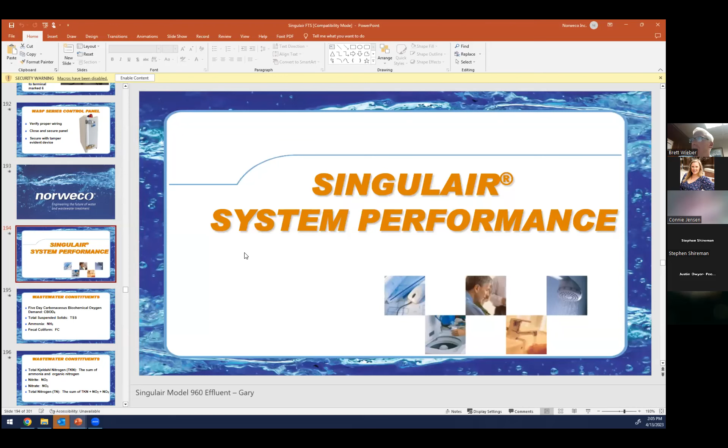Looking at this slide presentation here for a minute, talking about various performance standards, I think you're all familiar, so I won't spend a whole lot of time going over these basic wastewater constituents again: BOD, TSS, ammonia, fecal coliform, and the various other nutrient classifications, total Kjeldahl nitrogen, nitrites, nitrates.

Here, this is the Model 960, and this is a really good illustration of our system. So when you are inspecting or servicing our system, left to right here, pre-treatment, this is the aeration chamber, and importantly, the Model 206C aerator sits above the aeration chamber. The aspirator shaft goes 2.5 feet down into the wastewater. You can see there's the design flow line. And the third chamber is the clarification section. And in that are two crucial parts of our system.

You see the biostatic sludge return that is cast into the concrete. And when you're talking about our green system or our high density polyethylene system, we actually install the sludge return here at the factory. And then also part of that is the biokinetic or the BK system. This is a filter, so it's an effluent filter at the outlet. It also can be a disinfection device if you're using tablet chlorination and dechlorination. And you can see those feed tubes illustrated right at the top of the biokinetic system.

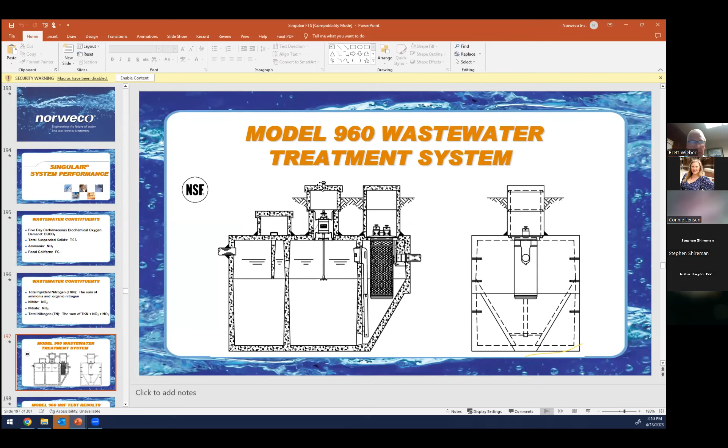Next, very quickly, this is just our test data. And at this point, I just want to be clear, I am happy to make available either our executive summaries or, to those of you who are interested, the full certification reports for both our Standard 40 and 245, and really anything else that you all would be interested in taking a look at. But you can see over this 6-month test that the effluent averaged 6 milligrams per liter CBOD, 10 milligrams per liter TSS.

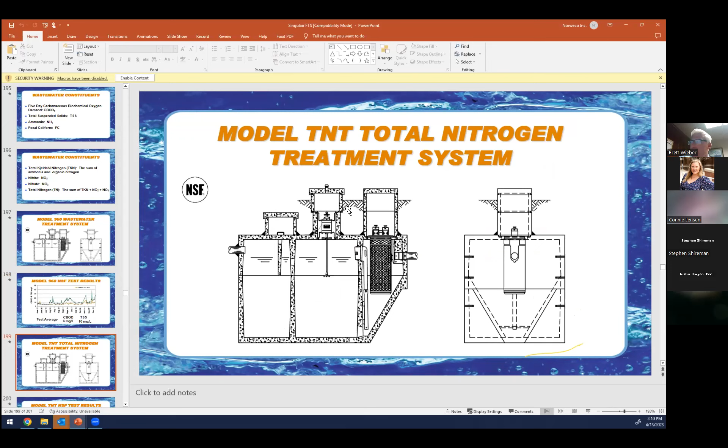This is just an illustration. You just saw this exact illustration, right? So same, the TNT model, same tankage, same components, same flow path. The only difference is the control panel. And you can see here during that NSF 245 test, part of what they test for, even as the 245 test, is the underlying Standard 40, and you can see 4 milligrams per liter CBOD, 9 milligrams per liter TSS.

This just shows the percent reduction. So you can see NSF has a specific standard in terms of both percentage and the amount. You can see during that 245 test, the Norweco Singulair TNT removed nitrogen on average 68% to 12 milligrams per liter. So that is a very aggressive standard.

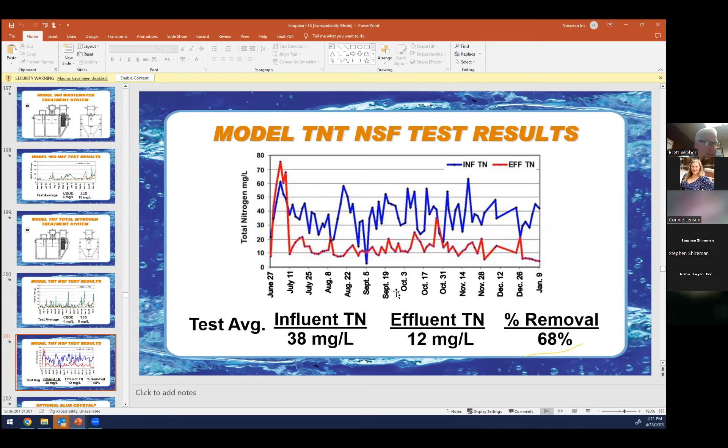This just talks about our disinfection option on the chemical side. I'm not sure if this, oh yeah. So this next slide shows our AT 1500. So this is our UV disinfection system, and this has been on the market now for a long time.

It has gotten a renewed interest because of what we all can agree were unfortunate events with regard to Salcor. And again, it was a sad circumstance. No one's happy about it, but the reality is there needs to be something that is comparable, and the Norweco AT 1500 UV disinfection system is, and many states, including, for example, Ohio, where I'm sitting, have approved that on an emergency basis, is my understanding, as a substitution if there's an issue with an older model light.

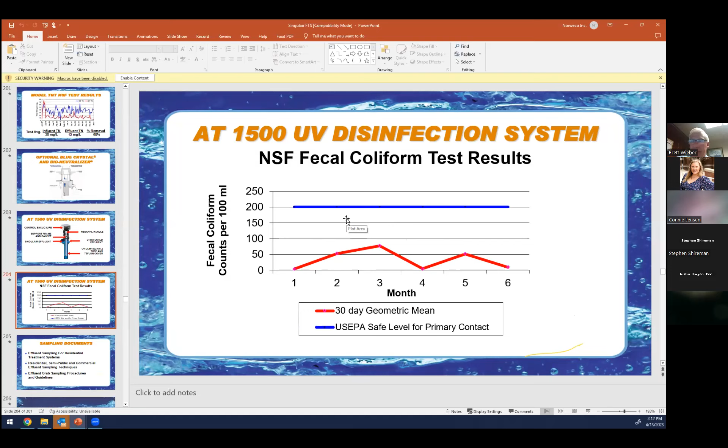This just shows how aggressively our UV system reduces the fecal coliform, and it obviously meets the very strict standard that NSF has, and we can all agree that's a good thing with regard to disinfection of effluent.

And I'll just close on this section. I think all of you probably have forgotten more than I know about sampling, so I certainly would defer to all of you. But I would also say, if any of you ever want to take a look at documents we have prepared in-house regarding proper sampling of our technology, it's a simple matter of giving me or Wyatt or our customer service team a call, or send us an email. We'll be happy to provide those to you. And these are simple 1 to 2 page documents that can provide all this information.

Okay. So next, let's see here, got to get a different presentation here. Bear with me, please. Oh, here it is. All right.

Okay, so I know this really is where we kind of get into the meat of things. I know you all are interested, obviously, in service. The Norweco technology, like all other proprietary technology, does require periodic service, and ours, like pretty much all of them, does require service every 6 months.

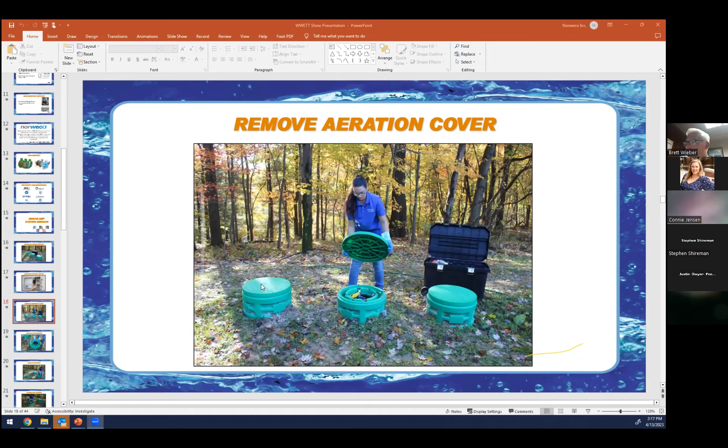The next step is to remove the aeration chamber vented access cover. Now you can see this is an old style Green lid. There is no vent cap, and there is no gasket around the edge. That's to be contrasted with these lids, which will both have a gasket, as we'll see down the line. Very simple. Of course, before you remove the aerator, you sure as heck better unplug it. I think we can all agree on that. Here you see one of our coworkers.

She's carefully removing the aerator from aeration. Now, again, the reason that's important, this is a precision tuned instrument. You do not want to bump the aspirator shaft on the side of the mounting casting. There are 2 set screws. You can see Wendy here is removing those set screws so she can remove the aspirator shaft.

You can then see she's using what effectively is a 22 caliber bore brush on a long steel rod, and she's going to run that up and down the motor shaft. Now, what's very important is you never want to use water under pressure through the Model 206C aerator motor casing. There's several reasons for that, not the least of which you don't need to do it. Simply running the brush tool through that a few times will get rid of any buildup that has come over that 6-month period. But also, you don't want to disturb the bearings in their casing, which particularly water coming from a pressure washer will do.

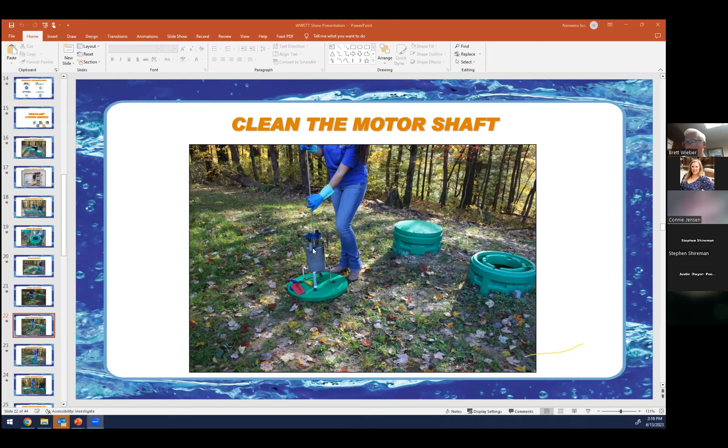You can see here she's using that same brush to go up and down the aspirator shaft. Now, very importantly, 2 things. You absolutely can use water under pressure through the aspirator shaft. There's no problem there. And then you can also see where I'm circling the aspirator tip. So there's 4 little tips that come out. You want to make sure that when you're inspecting it, make sure it's open. In other words, not blocked.

But again, you can also use that tool or a similar tool just to make sure that those 4 little air delivery tubes there are free of any buildup. You can see her doing that there. That's just with a very simple garden hose.

The next thing you want to do, and we're moving now into the step of removing the biokinetic system. First and foremost, you want to use this outlet coupling tool. This is all part of our tool caddy that you can see in the back there that is available through any of our local distributors. So there are literally dozens of folks through which you can purchase this tool caddy. But you can see Wendy is getting ready to insert this sealing tool. That's going to prevent, when we pull the BK, untreated effluent from getting out the back of the system. And it's very important that that be taken care of.

You'll see here, if the system has chlorination or dechlorination, you just simply remove those tubes. Very simple to do that. The moisture vapor shield, you'll see that again. You just want to unlock, just pick that up from around the 4 locking lugs and just set that aside. We'll talk about that a little bit more here as we move on. Next, you want to engage the small handle of a universal tool, which is another tool that comes in that tool caddy I just talked about.

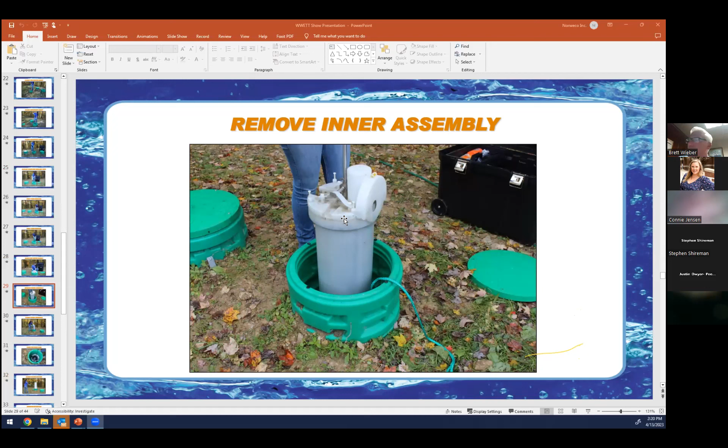That's going to be to take out that inner assembly. You want to lift that straight up. You then want to place that over pre-treatment, and you want to do as Wendy's doing here, gently rock it back and forth and side to side as you spray water in there. Any buildup that's inside that inner assembly will then wash down and will actually flow into pre-treatment. That's biological solid, so it will be a good thing during the service visit. And you want to do that for between a minute, 2 minutes, depending on what kind of buildup you have inside the biokinetics inner assembly.

Now we talk about removing the outer bucket, and it's a very simple process in terms of turning those locking lugs. And then you can see here that blocking tool, which is going to prevent anything from going out the back end of the system that's untreated. Okay, well, we don't show that, but the top of the universal tool can actually fit into the groove you see right around the top of the outer bucket. And you can just gently pull that up after you engage that drain valve at the bottom. And that's something you can do with the universal tool.

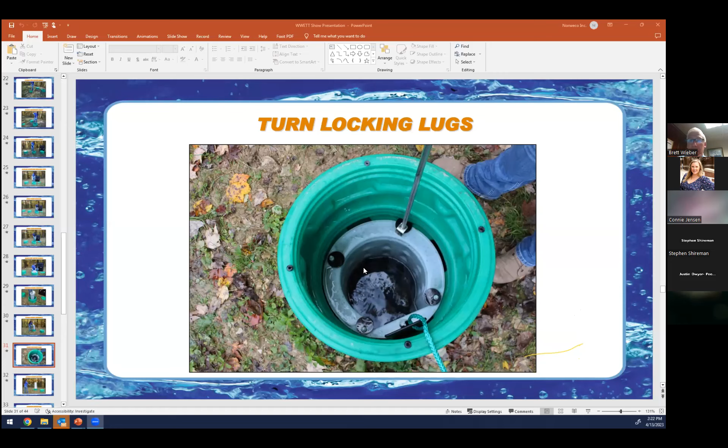Pull that straight up. And as I told you all, the water will literally come out as fast as you pull that out. That was a design improvement, as I said, about 22 years ago, because before that, believe it or not, you had to pump about 11 gallons back to pre-treatment. And I'll be polite and say that irritated some folks. So we heard them and we made an improvement. And we also have conversion kits. We actually make them available for free, where you can put your own drain and fill valve should you run into a more vintage model biokinetic system.

Wendy has turned this over. She's placed it. You can see the drain and fill valve there because this is now upside down. What you want to do is for about 30 seconds, you gently spray that media. So you have the filtration media and you have the peak flow media, and any major buildup will slough down into that safety service funnel and consequently right down into pre-treatment.

And again, this provides biological solids to pre-treatment. So that's going to get into aeration. And again, it will not have a negative effect on system performance. If anything, it's helpful because our system needs some of that biological solid.

So at that point, you reinstall the aerator, and you can see here, it's basically the reverse of when we pulled it out. You, of course, make sure that it's secure. And you want to then, again, plug that in because it needs a power source. You turn that aerator back on, and then what you want to do is you go to the clarification section.

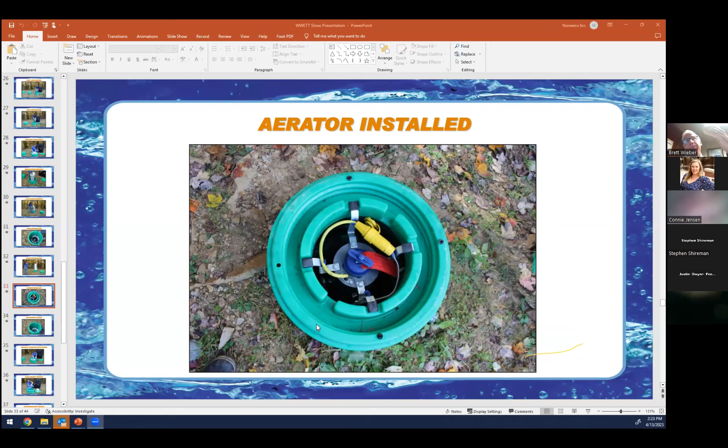You want to gently scrape the hopper walls, and it's important that it be activated when you're doing that, because it will take the solid material back into aeration through that transfer port between aeration and clarification for further treatment. Reinstalling that BK system is very simple. Effectively, it's, again, just do the opposite. You put the fill valve in, reinstall by turning the locking lugs to the outboard position, just turn them clockwise.

The vapor shield. So if you're inspecting a system, it's crucial that vapor shield is installed. It does not fasten or anything. There are 4 plastic screws that stick out of the BK system. You simply want to make sure that each of these 4 holes that are drilled in the moisture vapor shield are seated in those screws, because the moisture vapor shield does provide critical structural support in a pretty harsh environment, we can all agree. So just make sure that's there. And of course, if you're ever taking out the BK system, you want to make sure that gets reinstalled, again, simply by placing it over the system.

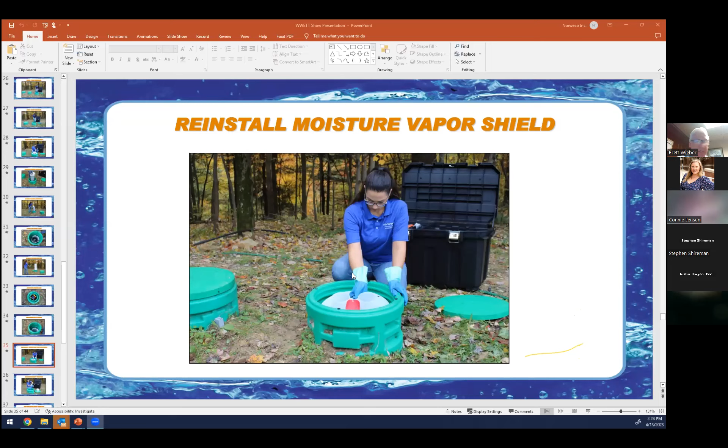To the extent there is chlorination or dechlor, you of course want to refill those feed tubes. If you're on an inspection, I just want to make clear, our feed tubes can hold, depending on the tablet, anywhere between 21 and 24 tablets. I strongly suggest you never have that many in there. I would say a good rule of thumb is keep it single digits. So 7 or 8 of the chlorination tablets, the blue crystal, the same with the dechlorination tablets. And the reason for this is because it'll prevent caking.

If you have too many in there, what happens is they tend to dissolve too quickly, and it just can create a problem. So again, you just want to keep that at, I would say, 7 or 8, just as a good rule of thumb. You can see Wendy's doing that there with that dechlor. You can see here the feed tubes are installed. What's very important is, of course, the chlorination needs to be upstream, right? So closer to the inlet of the system, whereas the dechlor, of course, would be downstream. And that, of course, is logical with the flow of the system.

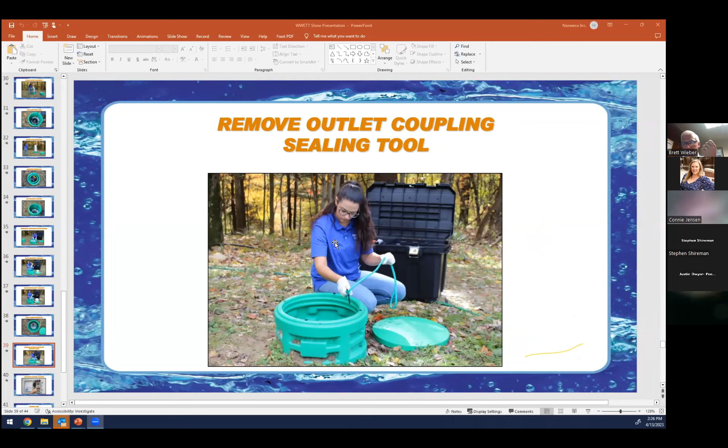Again, very importantly, and you don't want to forget this, remove that outlet coupling sealing tool. Very simple at that point. That little rope, she just pulls that out. And then you want to go back to the control center, make sure to power it back up. It's very intuitive. That obviously is an important step. If the system has telemetry, and our control centers do have a telemetry option if regulations require or if the homeowner desires it, by hitting the reset button when you leave, that will record a service visit. You can also record an inspection if you're so inclined, by basically doing that same thing.

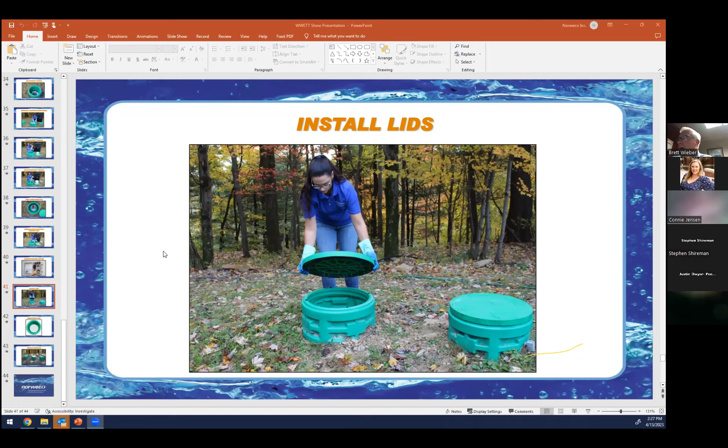Very importantly, whether you're on a service visit or an inspection or both, and again, I know you all know this, but it does bear repeating, take that extra minute to make sure the system is buttoned up before you leave. And again, I don't need to go into the reasons why. There are many, most importantly, safety of people and pets and things like that. We do offer, I just want to make clear, riser safety nets, and we strongly encourage our partners to utilize these.

Again, we want to encourage safety, and this is just another simple step to take. These are very strong. We do make them available for both plastic and concrete risers across all our different units, including all of the different Singulair models that we offer. And this is just a representation of the opposite of when you show up, right? So this is how it ought to be when you take off.

Very importantly, again, it's a little easier now, but some of our older green systems still have the gasketed versus non-gasketed lids. And just take that extra second. Whether you're popping the lid just to do an inspection or a service, take that extra second to make sure the vented lid is over aeration. And again, you all know why, so I won't belabor that point.

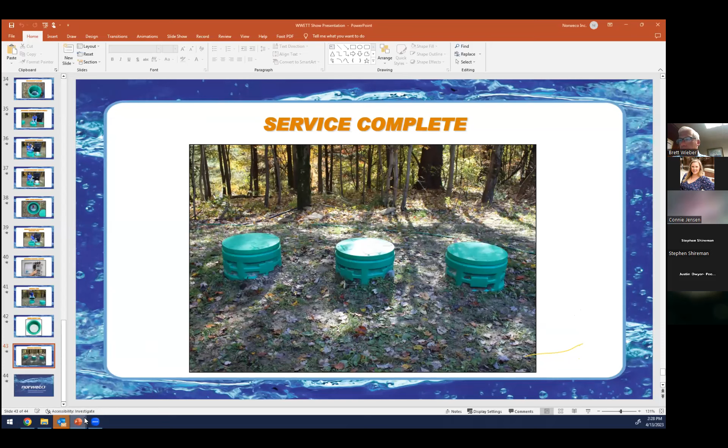So you guys all know, or you found out today, that our system is not like a septic tank. Of course, it does a lot more biological treatment, and it relies upon the activated sludge process versus just being an anaerobic system like a traditional septic tank. Consequently, that means our system is going to require a lot less frequent pumping. And I will tell you that in a properly operating Singulair system, the only chamber that will require pumping is the pretreatment chamber.

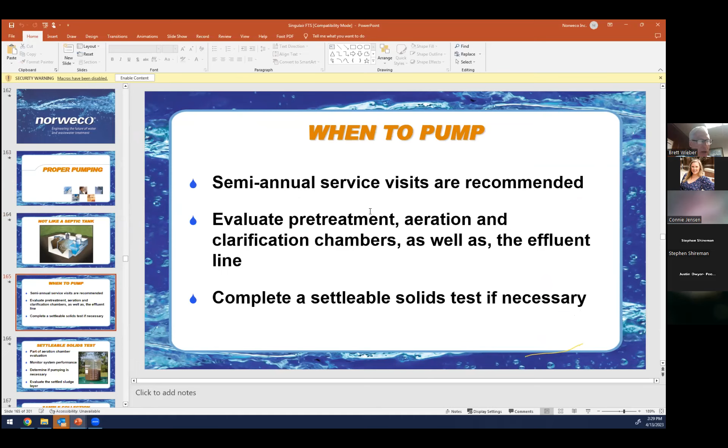Again, you always want to check to verify whether a system needs to be pumped during these semi-annual service visits. We do actually make this very straightforward. We do provide our partners with step-by-step instructions as to how to determine that. And it really starts with what's called a settleable solids test. It's part of every service visit. You should make sure that's being done. This helps to see how the system is operating. And again, it'll make it clear as you're getting closer to requiring a system pump out.

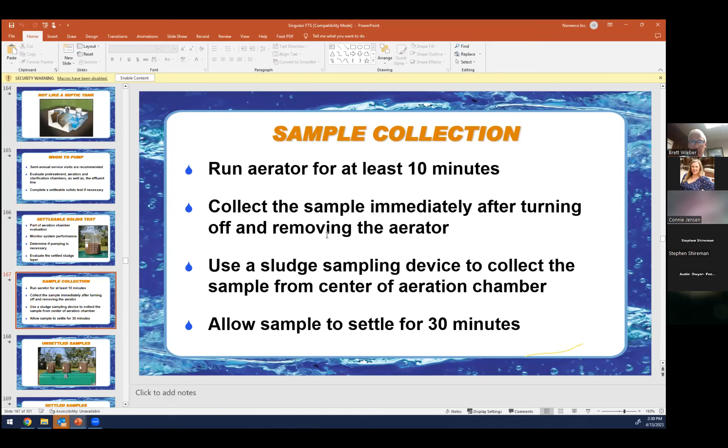One thing I also want to point out in our larger capacity systems, that is to say the 1,000, the 1,250, and the 1,500, those systems have 2 aeration chambers. So you want to make sure that the settleable solids test is performed on both aeration chambers for the Norweco larger capacity systems. And again, that's 1,000, 1,250, and 1,500 respectively.

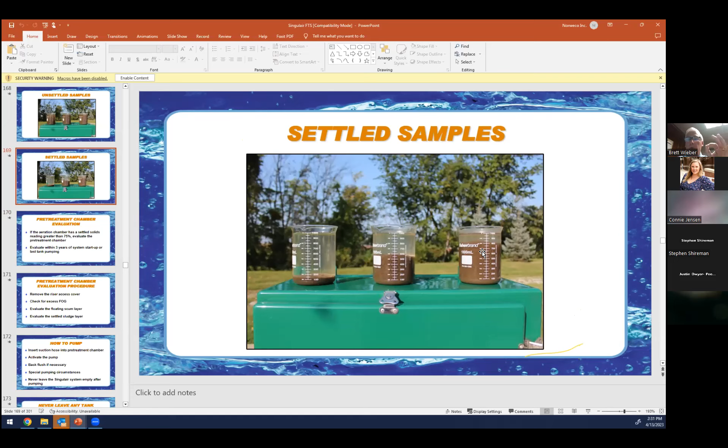Now, this sample here that I'm circling, we know that's failed that settleable solids test. I just want to stress that does not mean that you tell the homeowner or the service provider that they have to pump it or have someone pump it. What that does mean is you have to proceed to a pretreatment chamber evaluation. So in this case, we've not passed that settleable solids test. So let's go and do a pretreatment chamber evaluation.

Very simple. One of the things we tell inspectors and service providers both, when you pop the pretreatment chamber lid, and if you see a lot of fats, oils, and grease, or a lot of non-biodegradable material, a lot of toilet paper, it's a good idea to have a discussion with the homeowner, not to change the way they're living their life, but just to be mindful that getting rid of excess non-biodegradable materials, not only for a Singulair, but really any on-site system, frankly, even a septic tank, is not a good idea.

You just want to be careful about what you're flushing down the toilet. So again, we just kind of put that out there as a starting proposition. But what's critical to the pre-treatment chamber evaluation is an evaluation of that floating scum layer. In a Singulair pre-treatment chamber, you'll have a floating scum layer, and you'll have a settled sludge layer. And in the middle of those is a nascent zone that, if you use a sludge judge, is actually very, very clear. Now, again, it's still obviously wastewater, and you need to keep that in mind. But it's a very clear nascent section that you'll find in the middle.

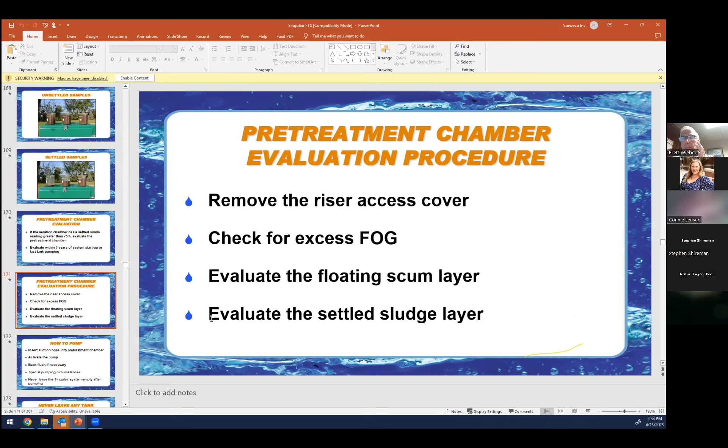So if you're at 10 inches or more, or with the settled sludge layer, you can check that using a sludge judge. That's really the best, and I think really the only way you can do that properly. If that is at 35 inches or more, in either of those cases, then it is time to pump the Singulair system. It's very important that when you go to pump the system, you make sure that you're doing this properly. So again, it's pretty straightforward, and I can make these instructions available, whether inspector, service provider, regulators, anyone who wants to take a look at them.

It's just important that the suction hose be placed in there, hit the bottom, remove it a couple inches, and fire up that suction hose. This is not a situation where it needs to be sucked dry. You do not need to backwash the walls. If those layers have become so thick and crusty that pumping it out might be problematic, you absolutely can backwash. But I just want to be clear, you can leave. In fact, we encourage folks to leave some of the biological material in there, because that'll be really helpful on system restart. It'll take the system even less time to get back to its full maturation.

One thing I want to point out too, if there are special circumstances that require the total system to be pumped, first and foremost, you want to make sure both the aerator and biokinetic system are removed. So in that instance, of course, you do want to engage that coupling tool. And also, you don't ever want to pump out of the clarification section. You don't need to, because when you pump out of the aeration chamber, the contents of the clarifier are going to pass through the transfer port between aeration and clarification, and it will be evacuated that way.

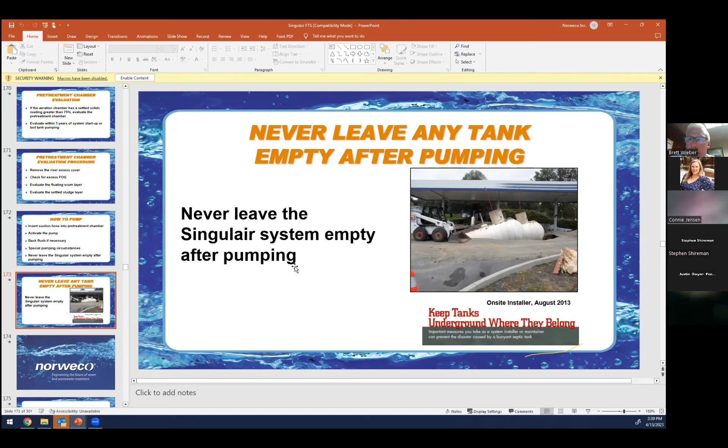For us, we recommend putting it all the way back up to that inlet invert, so to the design flow line. And again, I think you all know this, but I just stress the water doesn't have to be anything close to potable water, but it should not have any detritus in it, like excess amounts of mud or construction debris or leaves and things like that. Because those can be detrimental to system operation, and that's across the board. That's not just unique to our Singulair or our hydrokinetic technology.

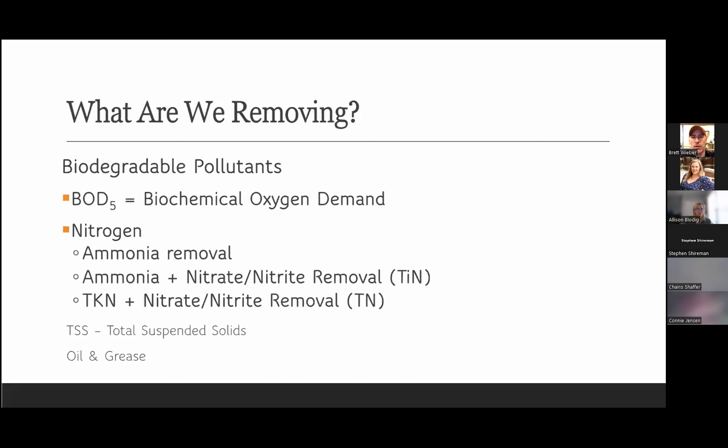So how we go about treating the wastewater is we use microbes, biology. I'm a biologist. That's my training. That's my background. Bacteria and other microbes grow inside our treatment systems because we basically give them the right environment to do so, right? And they need these things to be able to grow. And water is one of them, and that's always there. We're talking about wastewater. Oxygen, we're going to talk about some oxygen next up.

We actually need a little bit of nitrogen and phosphorus. So the microbes that grow require just a little bit of nitrogen and phosphorus to be alive. You know, it's in their DNA, it's in their RNA, it's in all parts of their cells. So they need some of that in order to survive. And then they need an energy source, which they get from the BOD that we give to them when we serve them up wastewater.

In fact, a lot of times we will do a series of treatments where we do take out BOD first and then work on the nitrogen when we have very tight nitrogen limits. So just a fun fact to know that not all bacteria need a specific carbon-based source. They can actually take it out of other chemicals, particularly alkalinity in this case.

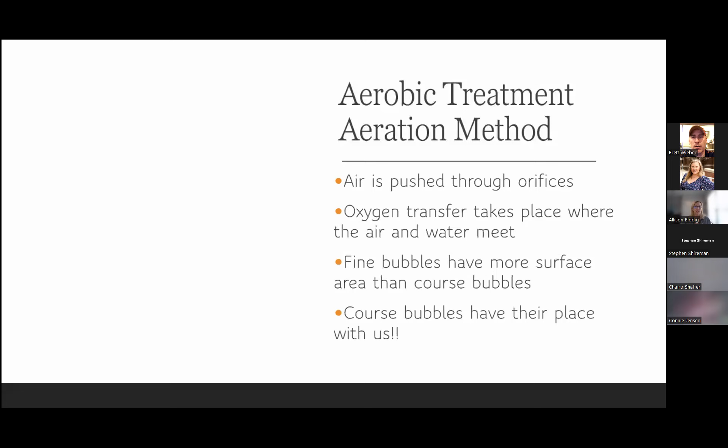And the diffusers that we make, or the orifices that we put in these pipes, are non-clogging. So one of the things we don't want you to ever have to do with our treatment systems is get into the wastewater area and have to mess with cleaning these diffusers. So that's why we do coarse bubble, a couple different reasons. One, so you don't have to get into the muck and maintain it. And two, to help keep our media clean in our EcoPod system.

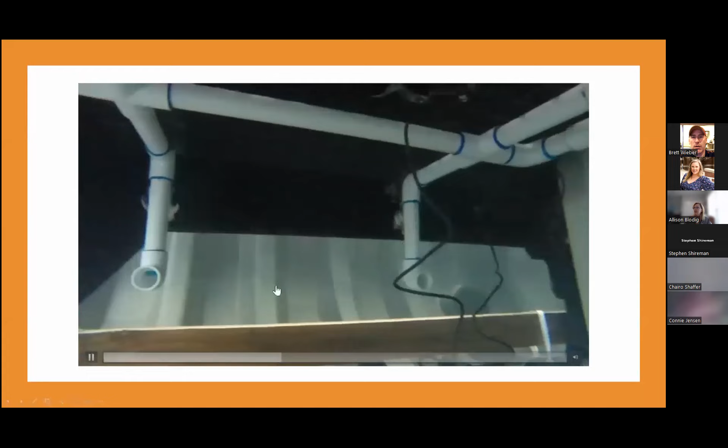So I wanted to show you a little video of the underneath side of an EcoPod system. It's not something that you're ever going to want to see because it's buried in wastewater. But this is a cool video that shows what coarse bubble diffusion looks like, both at the surface of the EcoPod and then underneath. So you can see here the top, and it's going under the unit, and you can see the air coming out the little holes on the side of those pipes.

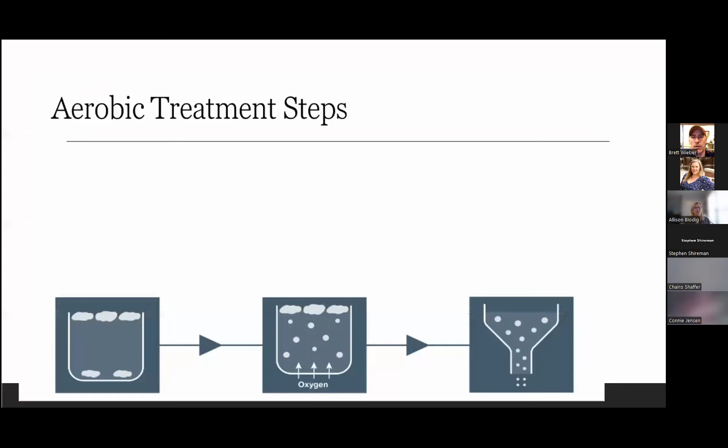When I first saw the Delta EcoPod system, my thought was that the air must be coming out of the elbows there at the end, but they come out of the little holes in the side of the air drops.

So basically, when you're talking aerobic treatment, you have 3 steps that you're going to go through for most systems. You're going to remove the trash and solids and the floatables in your trash tank. You're going to mix the microbes with wastewater and dissolved oxygen. And then clarification is needed in the system to keep the microbes in the system and out of your effluent, because if they go out with your effluent, they affect the quality of your effluent, and that means you're losing some of your microbiology activity.

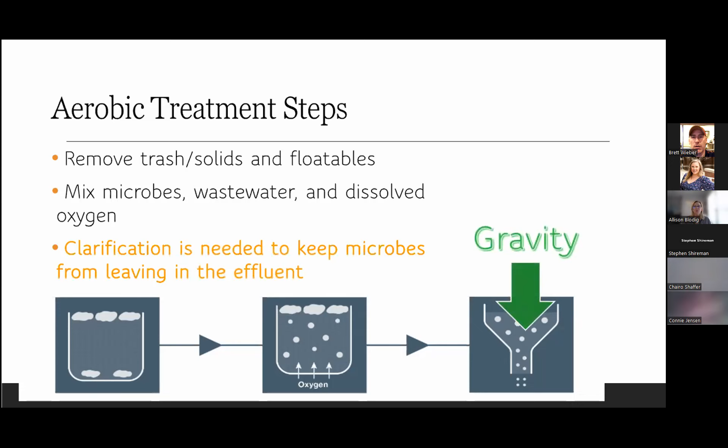And so, just as was shown in the previous presentation, most of us use gravity, and gravity works for keeping the microbes in our system for the most part. There's a few instances where we may have some issues pop up, and I'm going to go through those. But in general, we use gravity to keep things back inside our system.

So 2 different ways that we treat wastewater within our company: suspended growth, which is the microbes free float in what's called the mixed liquor. I always thought that was an interesting name, but basically they're floating around inside the tank and mixing with the food and the air. And then the fixed attached growth, where the microorganisms are attached to a fixed media that isn't moving. So basically you're bringing the food to the microbes that are attached.

When you're dealing with a mixed liquor type suspended growth system, you measure what you may have heard called the MLSS, which is mixed liquor suspended solids. It's a measure of the material floating in the reaction chamber, and it's typically kind of a microbe count. In essence, we're counting the microbes that are growing in there, and any inorganic suspended material in the chamber of

the aerobic treatment system. It's typical to have an activated sludge system or suspended growth system with a mixed liquor of around 3,000 up to about 6,000. That's a well-working machine when it's that way. Typically we'll take a mixed liquor if we're troubleshooting. It's not something that we do necessarily in the field every time, but I will show you how we manage that sludge in the systems once we get to that.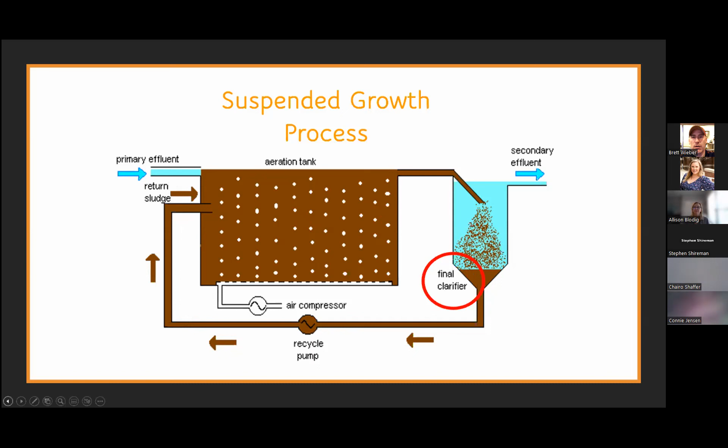So in these suspended growth reactors, the organisms come together and form a mass of microbes, and it's called a biological floc. I had mentioned we're mixing the food with those microbes. An animated depiction of that biological floc is in this picture here. It contains both live and dead organisms, and then they have sticky stuff.

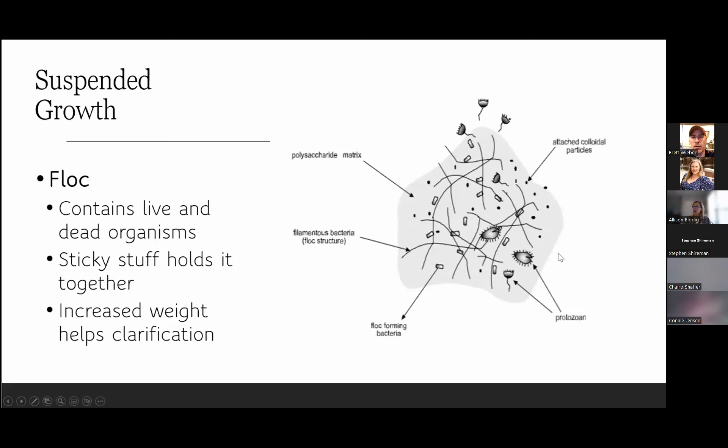That's the easy name for extracellular material, is what it's called. That holds everything together. And as everything comes together, it gets heavy, and the weight helps with that clarification process when you're using gravity. So it's very important that you have a floc that is nice and heavy.

Some of the things that can happen, you can have what's called pin floc. With pin floc, if you have too much food, it can cause an increase in the floc forming bacteria, making the floc too light, and it won't settle. So basically, if they have a lot of food, they're not likely to try to hang together and form a symbiotic type relationship where they're all working together to eat the sludge.

They're happy because they have plenty of food, and so they kind of go off on their own. And this can be hard to settle out. So if you have a system that's being overloaded, this might be one of the things that you'll run into, a pin floc.

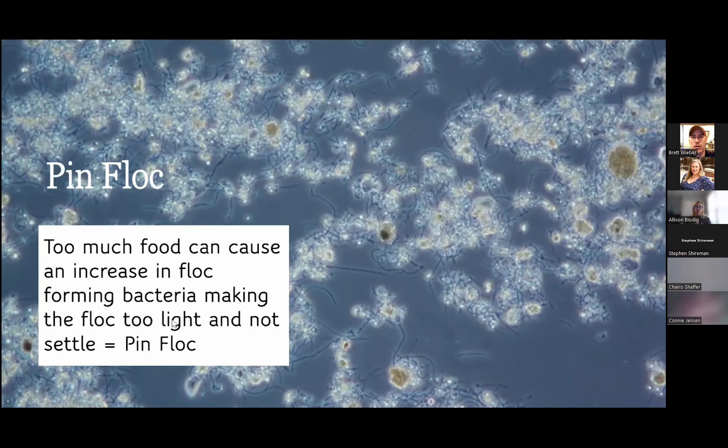Another issue is filamentous floc. Sometimes not enough food can cause this filamentous bacteria to expand outside of the floc, and it keeps everything else out. So anybody that's trying to get together, they get in the way. And the problem with filamentous floc is it tends to gum things up and cause a slimy type sludge that likes to stick to everything.

Another thing, I've seen filamentous floc start to form if you have some type of infiltration. Maybe it's from a leaky tank or riser, or maybe it's how the yard is graded and water tends to go towards the tank. You can get a filamentous type growth in that instance too.

So let's look at some of the Delta systems that we do work with in Illinois.

That are suspended growth. And the first one I want to touch on is our Enviro-Aire package plant. This is our commercial version of what we just looked at, right? So on the left-hand side of the screen, it shows a bar screen. You really can't see it, but the influent comes in. It goes into the aeration. You can see down here are diffusers that are in this package plant, and we aerate in this area here. And then it moves into this clarification basin.

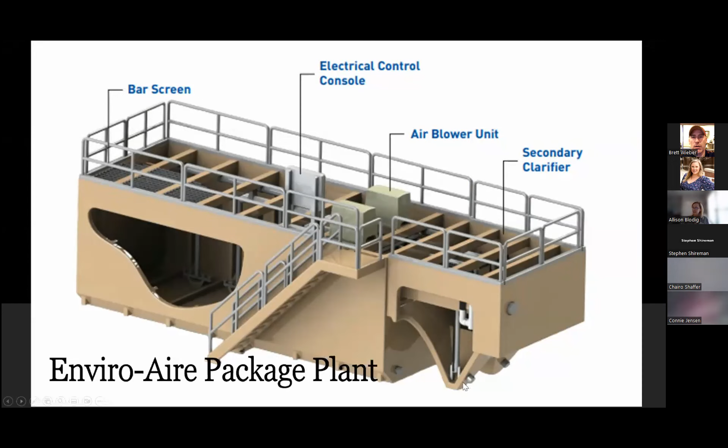So that is something we don't do a lot of in Illinois. Everything that we do at the package plant is typically going to be in steel, and sometimes those aren't looked at as favorably as concrete ones. And things have changed a lot in the industry where these package plants and the coatings that we now put on the outside can last a very, very long time.

And I think some of the issues in the past have been when these systems have not been taken care of and maybe they corrode. But these new coatings that are available, in fact, just about any color of the rainbow that you would want to put on a package plant, we can do. So if you want a pink one, we can do that for you.

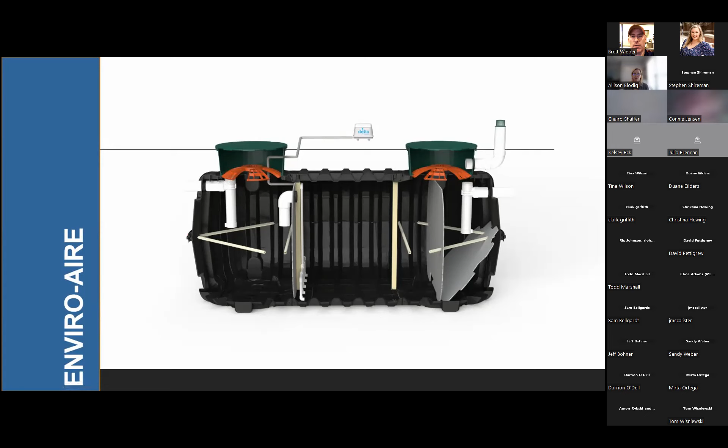And this is something that we do work with in Illinois in our IM tanks specifically. There are kits that go into concrete, but having the right concrete tank is super important. So these fit into our IM tanks really easily, and they're a nice little product. They come all ready to go: hook up the inlet, hook up the outlet and the blower, and you're ready to go.

The Enviro-Aire system is a Standard 40 system. It has gone through Standard 40 with a BOD of 12 and a TSS of 16 on average. And so these are the EA 52.5, a 500 gallon per day unit in an IM 1060, and the 75 is 750 gallons in the IM 1530.

Some of the benefits of this system, one of them I already said, is that it's lightweight, easy, ready to be installed when it arrives at the site. Industry proven solution. This is age-old technology that does work, and a small footprint by being in a single tank.

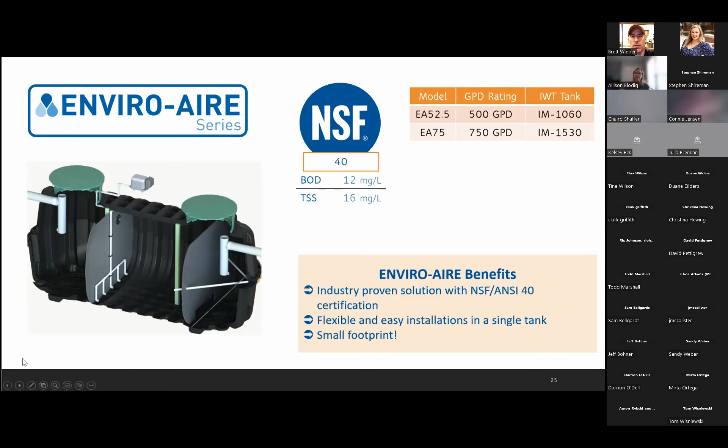A little different animal when it comes to wastewater treatment is a submerged attached growth. The microbes fix or attach themselves to the media, and the liquid that's containing the food and dissolved oxygen passes by those bacteria. And media filters are also kind of an attached fixed growth aerobic treatment process.

But the distinctions between this and a media filter, and when I say a media filter, like a sand filter, we're again mechanically introducing air into the system, and in most cases in an aerobic treatment type scenario, that media is submerged in the liquid level, while a media filter is what's called an unsubmerged or unsaturated type treatment system. So the fixed attached growth reactors have an inert medium submerged in the aeration chamber, and then, like I said, we bring the food and the oxygen to them.

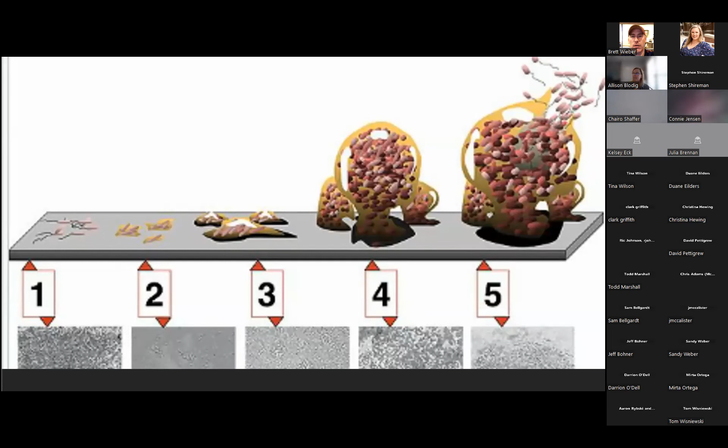The anaerobic bacteria will turn aerobic. They are called facultative bacteria that can do that, where they can live in both environments. So really, it's a nice feature for intermittent use, because these biological layers can come and go and survive very nicely even during intermittent use. They also start up really quickly as well when there's an attached growth part in the system.

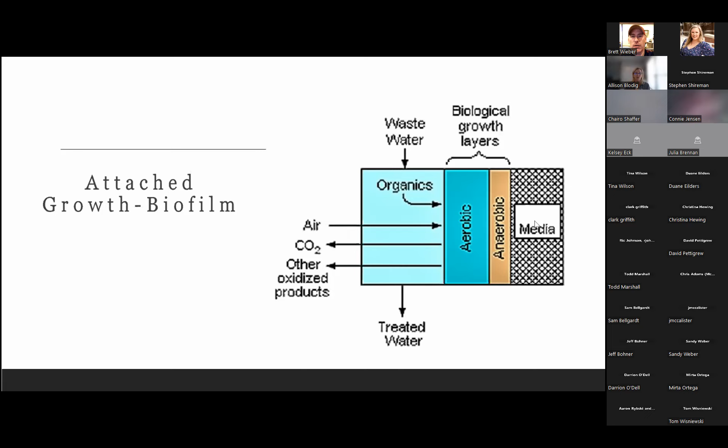We use a vertical fixed film media that, in the 7 years that I've been around this product, I've never known it to clog. So that's nice with that vertical straight up and down media. It's a nice feature. So our attached growth options.

So this is the EcoPod series. This is a residential size unit. It's 500 gallons. And this is what we call the reactor box. And the media is inside the reactor box. Inside this box is where all the treatment takes place. The tank is a vessel that it sits in, and I'm going to show you this.

So in this particular scenario, we have a pretreatment tank typically ahead of the system here, for trash and such. And then it goes into the EcoPod system and deposits wastewater on top of that media. And again, all of the aeration is confined to this box. And you saw in that video where it stays contained. The outside here is where we have our clarification.

So because of the type of bacteria that grow on an attached growth system, very dense, very heavy, there's no mixed liquor to worry about, and so it falls to the bottom and it stays there for removal by pumping out. So that's the unique thing about the Delta EcoPod system, that we don't have a separate clarifier other than this tank that surrounds it.

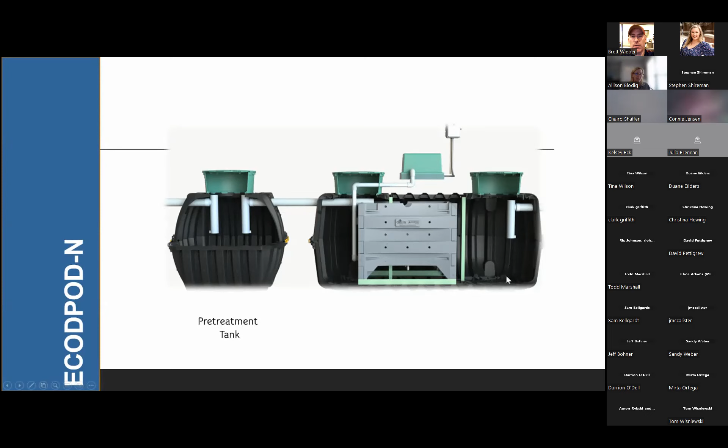So a lot of people might ask, well, where's your clarification zone? Or people might say they don't have a clarification zone, when in reality we have this entire tank as our clarification area. It's NSF 40, but it's also 245 certified. So that means that it did get some nitrogen removal. So the BOD was 9, TSS 8, and a 53% total nitrogen removal with this system at NSF.

We have all of these different models that can go into the IM tank. And again, that's nice because it comes to the site ready to be put into the ground. The 500, 600, 750, and 1,000 gallon fit into our IM tanks, but they also fit nicely into concrete tanks. And you'll see that a lot, particularly in our commercial type applications. But it's very robust, suitable for continuous or intermittent use. And we did talk about that. And that dense sludge takes up less volume in the tank, so you can maximize your storage space.

So this is just a depiction of the EcoPod system in steel tanks. We do these in steel tanks in Texas, mostly where they have some man camps that they're moving around, and they can pick this up in a steel tank and take it with them. So kind of cool. It's a little bit more expensive option than concrete, obviously.

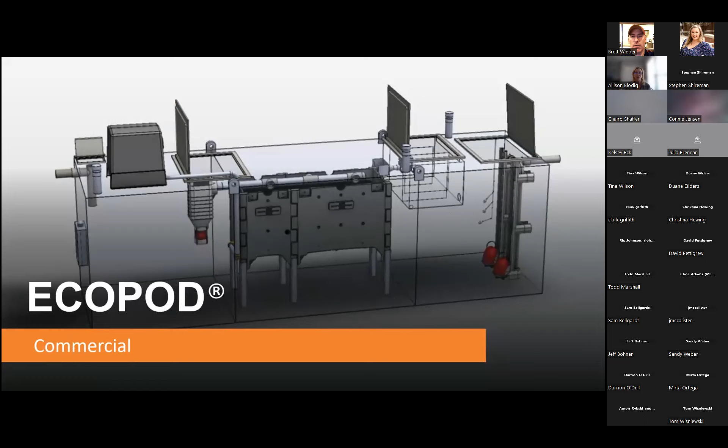I just wanted to show you some pictures of our commercial systems. They are made out of stainless steel. This is the distribution where we're distributing the wastewater over the top of the media in the reactor box. So it's a stainless steel reactor box. This shows the aeration grid underneath the unit. And this is our aeration header, where we're bringing air to the unit.

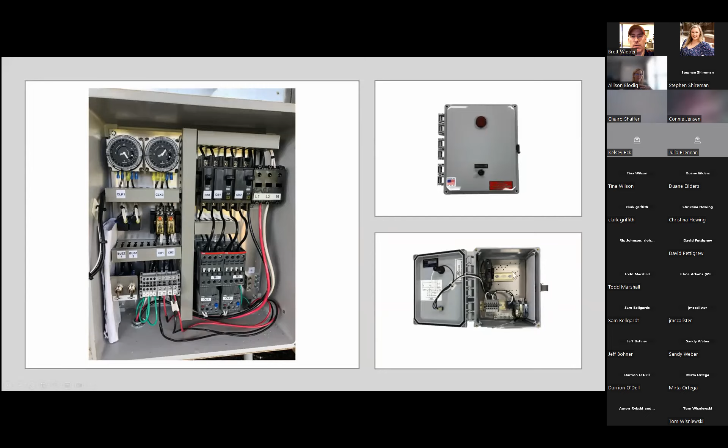The panels for these types of systems get a little bit more complex. Sometimes we have timers, sometimes we alternate blowers off and on in a commercial type system, so it can get more complex, whereas it can be just really simple. This is more of a residential side system over here.

For the commercial and residential systems, we do have standard drawings. They can be found on our website. There's a couple of different types of commercial units. The model number may read E200S or E200D. The E stands for EcoPod. The 200 times 10 equals the gallons per day, so an E200 is good for 2,000 gallons a day of residential strength waste. The S stands for single, a single layer of media, and D stands for double, a double layer of media.

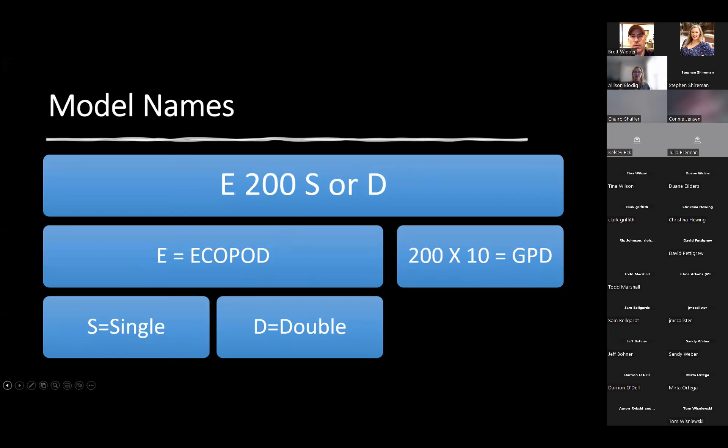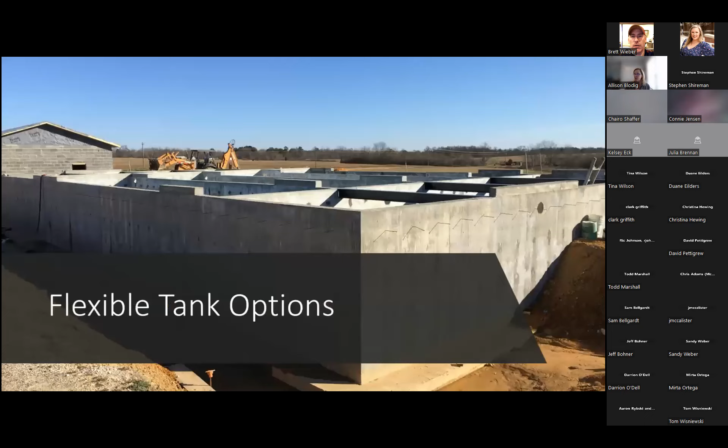Lots of different tank options for our systems, whether residential or commercial. This is depicting a poured-in-place tank for a large subdivision that we did in the south. But we can do precast, we can do fiberglass, and poured-in-place. And we can do our IM tanks for our residential units as well.

When it comes to installation, one of my favorite mantras over the 20 years I've been doing this is that as long as we design a system properly and it's installed, operated and maintained properly, these systems will work. There's no doubt in my mind, and there shouldn't be in yours. But there are important pieces in the installation process to make sure these systems get put in correctly. This holds true whether it's residential or commercial; it just happens to be depicting a 1,000-gallon reactor in an IM tank.

First, we're mechanically introducing air into the system. So one of the major components when installing a system in the ground is to be sure your airline connection is good and secured and doesn't break because it was installed improperly. Use good installation techniques of bedding your pipes so they're not going to shift and break when everything settles.

The next thing is the influent line. It comes out of the septic tank, commercial or residential, in an EcoPod system, and gets delivered into the reactor box. We need everything to go into the reactor box to make sure it gets treated before it leaves the tank. Believe it or not, I've been to more than one installation where they've just stopped the influent pipe outside the box. With commercial systems, even though we provide that distribution line over the top, sometimes they just don't hook that up.

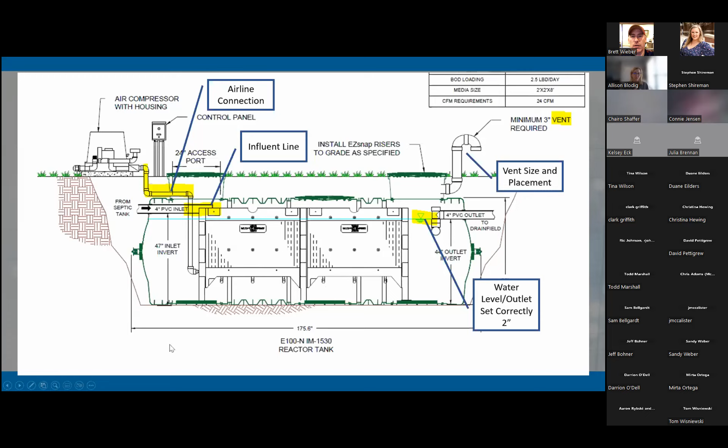And then vents. So particularly when we have regenerative type blowers, that back pressure is important. And we're going to talk about vents a little bit more here. So the vent in this installation, why do we need a vent? First of all, if we're adding a bunch of air into the system, it needs a place to get out. And so the recommended location for a vent is coming out of the riser of the system. And we ship the screen vent here to allow the air to have an easy way to get out.

If you're using an Enviro air system, which uses a little different blower, which we'll talk about, it's not a regenerative type blower, you can put your vent in the outlet pipe. They aren't as susceptible to back pressure. So if you have some existing EcoPod systems in the ground and they have a regenerative type blower, venting is something that is crucial to the performance.

The control panels, we touched on them a little bit when we were talking about the commercial systems, but you want to install these on a residential system where you can have easy access, where you can actually maybe sit on a riser and work on them, or you don't have to lay on the ground to be able to see inside the panel. So install for easy access. Avoid water. You don't want to put them under an area of the roof where water is going to drip on them. And it alarms when you lose air pressure or when the pressure gets high, and that's a signal of high water level in the treatment tank.

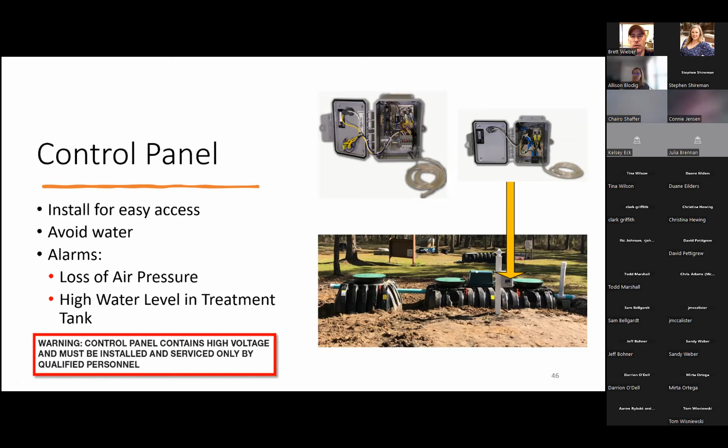When it comes to the aerators for the EcoPod systems and the EA systems, we have a couple of different types of blowers. One's a compressor that we use for the EA system. And then we can use a compressor or a regen type blower for an EcoPod system. So you want to keep your aerator near the control panel. Be a good place for it, within 100 feet of the treatment unit. They can only push air so far. And so you're going to want to keep the unit that you're aerating within 100 feet of the aerator.

And don't install where you're going to have water collecting. It's an electrical piece of equipment. So you want to keep it up and out of low-lying areas. A couple of important maintenance pieces that I wanted to touch on.

So all of the systems themselves are pretty easy to maintain. Anything that's mechanical or electrical, just need to keep those operating, check for corrosion, things like that. So the panel, the blower, look at those things to make sure they're running and running properly. Keeping the filters and screens that are on the blowers themselves, as well as any effluent screens that you might put on.

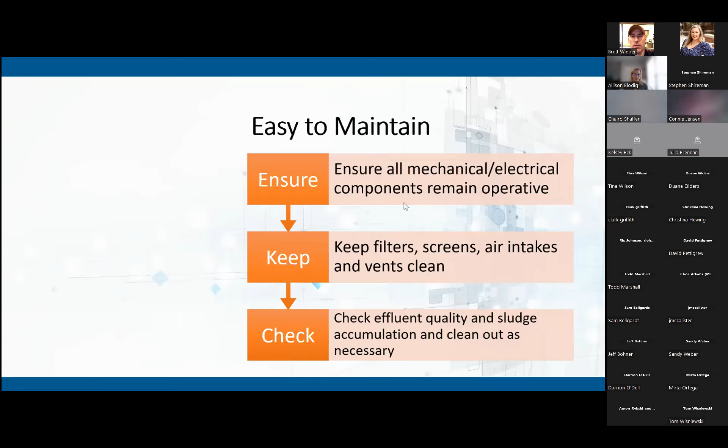So all of our commercial systems have a requirement for an effluent filter on the settling portion of the tank before the EcoPod system. So that would need to be kept clean. So anything that's a filter or a screen, anything that's taking in air or putting out air needs to be kept clean. And then you want to check your effluent quality. Of course, take a look at that. Make sure it's clean, clear, and smells nice. And then check for sludge accumulation in any of the units. And there's a couple different ways to do that, and we'll talk about that.

So when it comes to, again, in general, do maintenance per the manual and the local requirements. So when we sell a system that's an NSF system for residential, it's required to be serviced twice a year for the first 2 years, and then a maintenance contract is required to be offered afterwards. So we offer it. If the homeowner doesn't take it, there's not a whole lot we can do, but the first 2 years comes with the treatment system for residential.

So we'll keep going. So when it comes to the Enviro-Aire, you want to check your aerator and air line to ensure proper operation. So you're going to look inside, make sure you're getting a rolling motion in this area here. So that means your air line is intact and delivering air to this aeration area. You want to check the vent for any foul odors. I always say when you walk up to a site and you're doing maintenance, you need to use your eyes, your nose, and your ears. The only thing you don't really use is taste, but that smell will be noticeable.

In some areas, if you do have a foul odor coming out of the system, it may not be a treatment issue. It may be some sulfides in your background water. And I don't know if any areas of Illinois have sulfide in their drinking water, but I do know in Wisconsin, north of you, they do. And if you have sulfides in your background water and you start blowing air into wastewater, it does have a rotten egg smell. So for that, you would want to use some sort of a carbon type vent. But if you do smell odors and that's not the case, then you need to look for things like, is the airline really intact? Is it cracked? Is it really aerating like it should? Is the system overloaded? Because that can be a reason for odors as well.

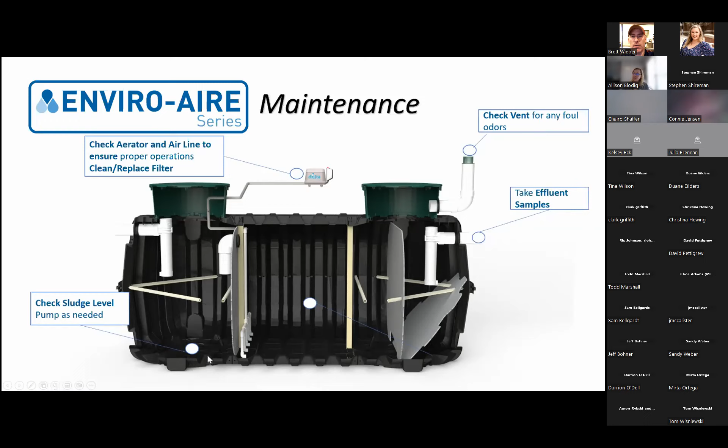Take a look at the effluent, make sure it looks clean and clear. Not always will you have access to get it after the tank. You may have to look in the clarification area. But make sure it doesn't have an odor, it's clean and clear. And check the sludge levels in the first compartment of your trash tank and pump it as needed. And then you need to check your sludge volume in here, your mixed liquor, so to speak. And I told you, we don't really do a lab test when we're testing for that in the field.

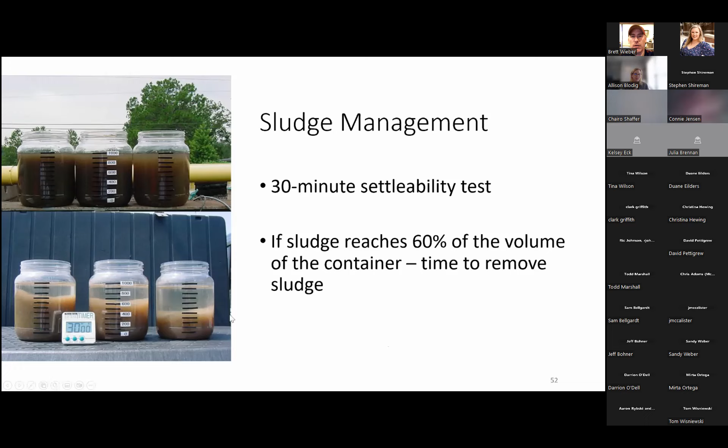What we'll do is take a sample of the mixed liquor out of the aeration compartment and put it into a clear container and let it sit for about 30 minutes. That will be definitely long enough. Sometimes you can tell right away, it goes faster. But if the sludge reaches 60% of the volume of the container, it's time to remove some of that sludge. It's called wasting. And so these are 3 different types of sludge. But once it gets up to about 60%, you need to have some of it pumped out. You're going to leave some in there to reseed it. But if it looks something like this, you're good to go. The one on the right.

When it comes to EcoPod, again, we're checking the aerator and the airline to ensure proper operations, clean and replace the filter as needed. Same as with the EA unit and same commercially. Ensure the control panel is working properly. Check vents for the foul odors. Same things that you're looking for here. If there is a foul odor that is not attributed to sulfides, then it may be due to overloading or a cracked airline.

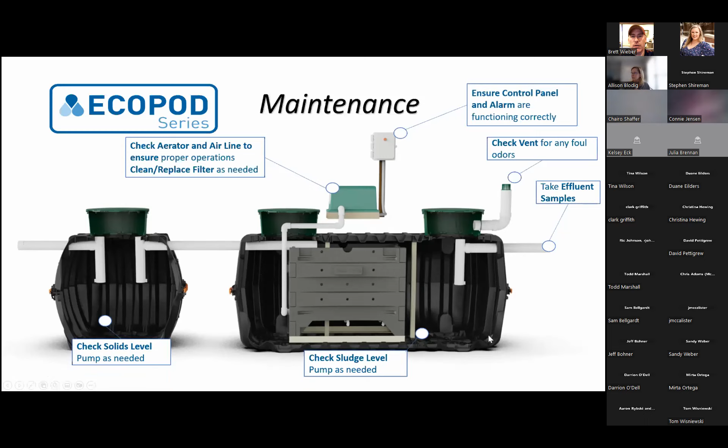Take effluent samples out of here as well. Check your solids level in your trash tank and check your solids level underneath the EcoPod unit itself. Because remember, this whole area out here is quiet and the sludge is settling down here for storage. So how you sample that is the same way you check for sludge in your trash tank. You need a sludge judge and you need to measure it under the EcoPod and remove it as needed.

And depending on the size or the tank that you use, because we can be used in a lot of different tanks, particularly the EcoPod system, it's going to vary. And some of the commercial systems may have 30 some inches of sludge storage underneath them. So they have a lot of capacity to hold sludge. The smaller systems, not as much. They may have 10 inches of sludge storage underneath them. So it just needs to be measured, and you need to understand what your tank shape is.

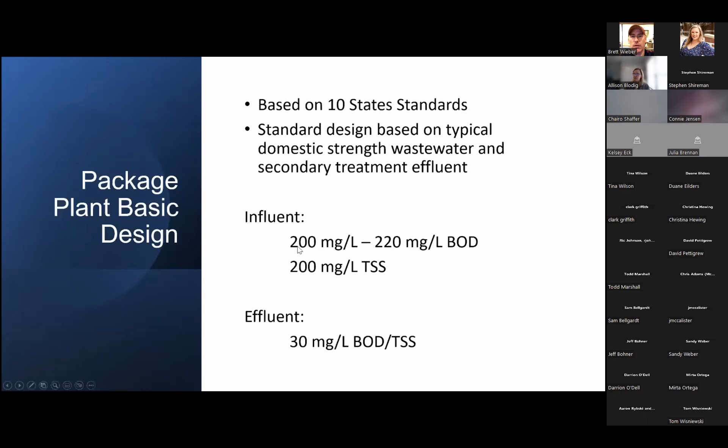I want to talk a little bit about commercial system design. So our basic package plant is based on 10 States Standards. If you haven't heard of that, it was a group of 10 states that got together and said, hey, this is how we want an extended aeration package plant to be built. It's a standard design based on typical domestic strength wastewater. So the influent is expected to be 200 to 220 BOD, TSS around 200, and the effluent requirement would be 30 for the standard design, just the straight up aeration design.

So when it meets those requirements, the aeration basin capacity is going to be equal to your average daily flow. So if you have an average daily flow of 25,000 gallons, that aeration basin will be 25,000 gallons of capacity. If you have a higher strength waste, or if you have a requirement for BOD and nitrogen reduction, you could have 1.5 times the capacity of aeration volume. Plus, you might end up with 50,000 gallons of aeration if it's the right kind of wastewater.

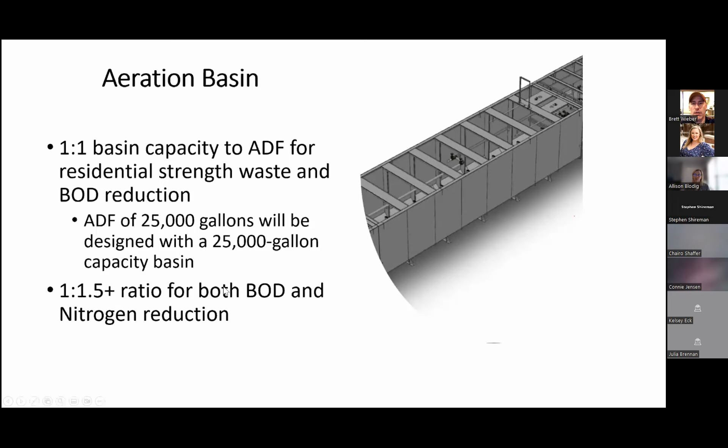So in general, that's how an extended aeration commercial type system is done. A lot of these that go in are for residential subdivisions, so they go in based on average daily flow, and that's how they're sized for their aeration basin. When it comes to the EcoPod system in particular, we pay even more attention to our loads, and we use what's called the magic wastewater equation. I have probably used this equation a million times in my 20 years. Every week, dozens of times a week.

So if I have 1,000 gallons per day at 300 milligrams per liter, and I put it in the magic wastewater equation, I get 2.5 pounds per day of BOD that I need to remove. If I have 1,000 gallons per day, but it's 600 milligrams per liter, I end up with double that, 5 pounds, and so on and so forth. So it's very linear. As the strength of the wastewater changes, it goes up. And it's very important that when you're doing a commercial facility that you do not just design based on the flow. You have to factor in the strength of the wastewater.

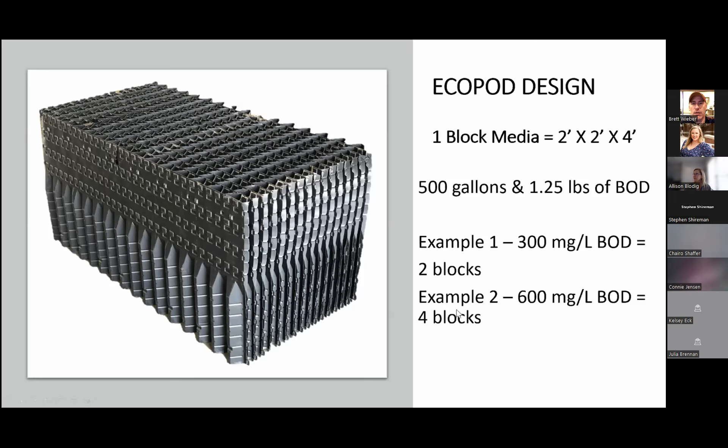So also when we get commercial applications, I just wanted to talk about some of the other things that we take into account, because we do try to look at a lot of different things, mainly climate. When it's cold outside, and it does get kind of cold in Illinois, the bacteria that we use, the microbes that we're trying to grow, the reaction rates that they work in slow down. They move slower in the winter, just like we do.

And in cases where you need nitrogen removal, if the wastewater gets too cold, it can eliminate nitrification. The good thing about the industry that we're in is these systems that we put in, typically the wastewater that we see is not going to be that cold. The tanks are right next to the buildings, within 10 feet, maybe a little further, but all underground.

So we typically don't see a really cold wastewater unless we get into the bigger subdivision type things where you're collecting wastewater and you're bringing it from farther out. Then you can start to have some temperature issues with cold. Too hot, probably also not going to be an issue in Illinois, again, because things are buried.

But when the wastewater gets too hot, it slows the reaction time of the bacteria, because the water, when it's hot, can't hold as much oxygen in it. It's just the nature of the beast. The water will not hold on to that dissolved oxygen.

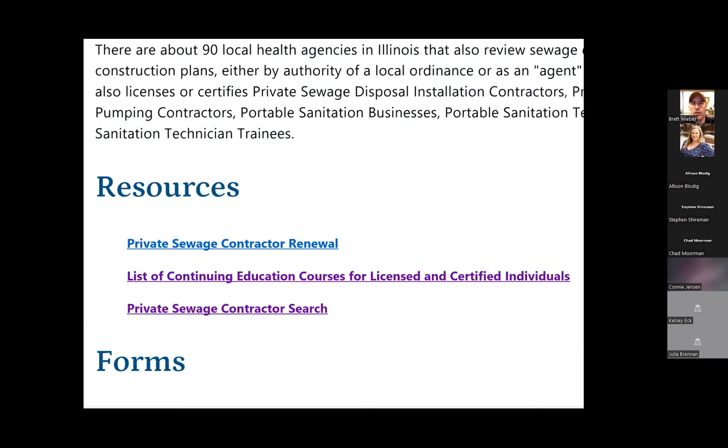Continuing education is the next point. If you look on our website, the Private Sewage Disposal Program website, down at the bottom, they have resources. So we have the contractor renewal page. So when they come to renew their license, they can renew it from this link here. And then the next one is the continuing education courses for certified individuals. Anything that is posted on here can be used for local health protection grant hours also. So if you have someone that needs hours, those courses are available.

Take those. So if you click on that link, the continuing education courses, you're going to get this portion right here. Sorry, my laser pointer stopped working. All right, here we go. This portion right here, where you'll click to get to the calendar of what is available and what's coming, what's been approved.

At this point, the last training was today. That's on the schedule that's been approved. It was a virtual training. So there will be more in the near future. As we receive them, we do post them and approve them.

If you do want to schedule a training, if there's a local health department, or someone in your area, or if a contractor has a new system or a system design they want to propose, manufacturer, anybody who wants to put on training, there is a procedure. We have a form. Basically, we need to know who's providing the training, the hours, and who's the audience. Is it for pumpers, installers, that kind of thing, or portable sanitation? So there's a basic form. It's pretty easy. So if somebody does want to put on training or a field day, please contact me and we can get something set up, or I can help you facilitate that.

So looking back on that resource list, on the page, the private sewage contractor search, there has been an issue with that link. I've been trying to get it fixed, but the link is bad somehow. So there is a working link that I do have. So if you do need that, please email me and I can get you to that.

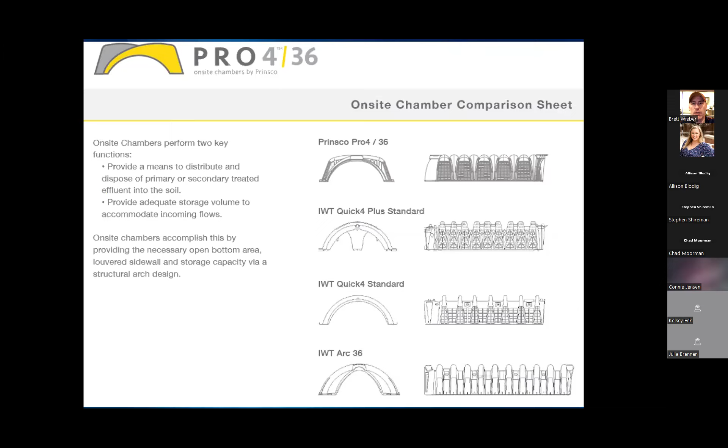Next one, Infiltrator. They did come out with a new chamber system. I'm not sure if it's fully on the market in Illinois yet, but they did get approval for it. Instead of the Quick 4, it is now the Quick 5. So basically the change is that instead of being 4 foot long, it is 5 foot long. Otherwise, the internal dimensions and square foot bottom area are still identical. Sizing criteria per linear foot is still the same. It's just a foot longer.

So they did that with the Quick Standard chamber, and they also did that with the Equalizer 36 chamber. So they have both of those available. They're both sized the same, square foot per linear foot. It's just the product is a foot longer.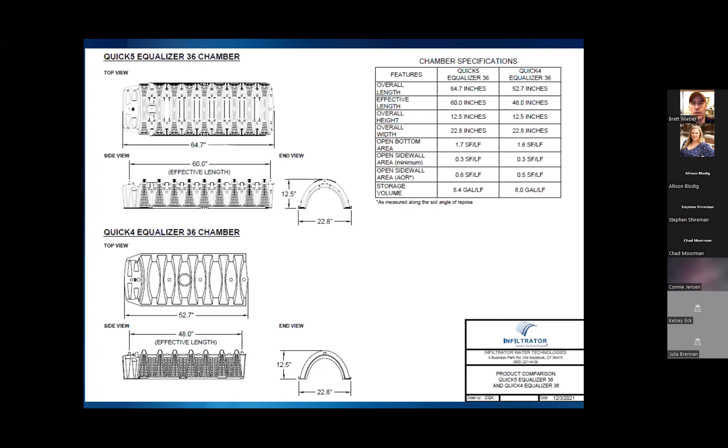So we do have the chamber sizing memo. I did update that with all of the new chambers. So if you look at it, you'll see the additions, with all the square foot per linear foot criteria and the average inside bottom dimensions for the new Quick 5 and the Prinsco Pro 4036. So if you need a copy of that, please feel free to email me. I have also posted that on the portal as well.

The next one is through Anua. It is a sequencing batch reactor, so this can be used with the Illinois raised filter bed. It's NSF 40 listed. The units are the 4 through the 14, so depending on the size, 400 gallons to 1,400 gallons. It is a Class 1 system, so capable of meeting those discharge standards.

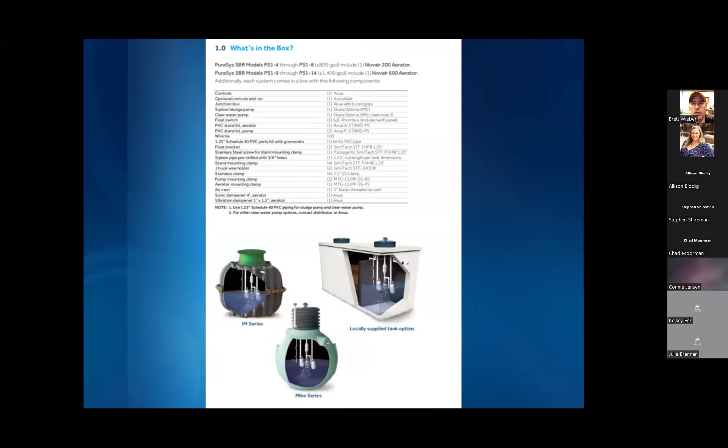So like I said, it is a sequencing batch reactor. So different than a flow-through system, it treats for a long period of time and then has a discharge. This is the aeration chamber. It has pre-treatment, clarification, and then a discharge chamber. If you're not familiar with the sequencing batch reactor process, the effluent comes into the system throughout the day and is aerated, and then late at night, like 3 o'clock in the morning, when it's not being used, the system will shut off, allow it to settle, and then discharge that clear water into the pumping zone.

And with their unit, they also have a sludge return where it'll take the solids and push those back into the pre-treatment tank. And then it starts the process all over again. So it's capable of being used with the Illinois raised filter bed, because it is a requirement of the Illinois raised filter bed to use a batch treatment system.

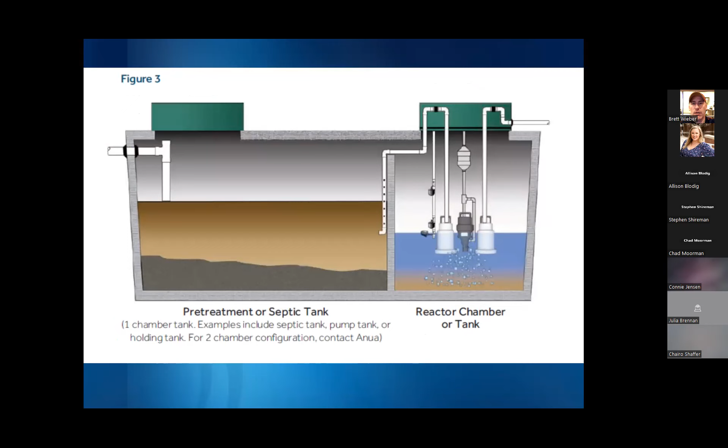So this is a cross section of the tank. You can see the reactor chamber and then the pre-treatment. The design criteria for their tank and the sizing are based upon the flows. So depending on the application, whether you're using it for residential or non-residential, you'll be able to size the system on what's needed or required.

Another cross section of the tank. The next one is the HOOT system. This is the LA HOOT 500. They have the design criteria from 500 gallons a day to 1,000 gallons a day systems. So it is NSF Standard 40 approved.

This is the cross section of their unit with the pre-treatment tank, aeration component, and the clarification zone. So that's another unit that is available.

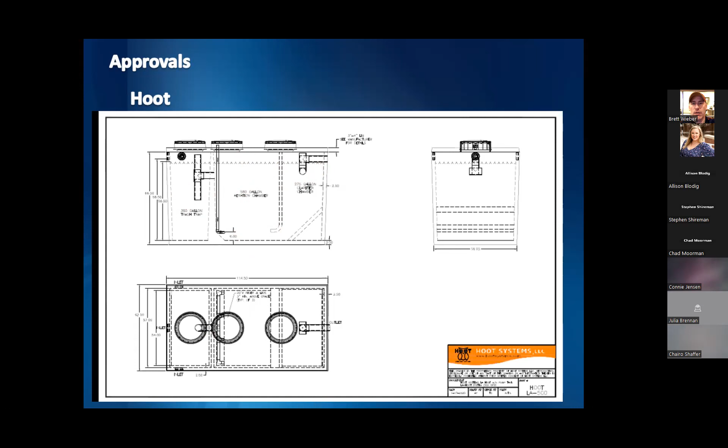The next thing, the EcoFlow EnviroChlor tablet chlorinators. It is NSF Standard 46. The chlorinator tube has been approved and met NSF 40 or 46 standards. So they are able to use the system that met the requirements of our private sewage disposal code, which is 905-120F for disinfection, those standards. So they can use this.

It can be certified to use without a contact chamber because it has met the requirements of NSF. So it's a little bit different than what's been used in the past as far as just having a chlorine tube and a 50-gallon contact chamber to assure that it was getting proper treatment. With the NSF 46 test, it did prove that it did get the requirements.

One thing that is in addition with NSF Standard 46 is they treat to 200 parts per million, where our code requires the 400 parts per million. So the NSF 46 is a much stricter standard than the state code as far as the discharge requirement. So it did meet that criteria.

One of the factors, though, of that approval is that you have to use the 2 tablets that are established by that certification. So you have to use either the Pro-Chlor tabs or the PPG AccuTab chemical tablets. So they have to use those if they're going to use that without the contact chamber, as the certification has been approved.

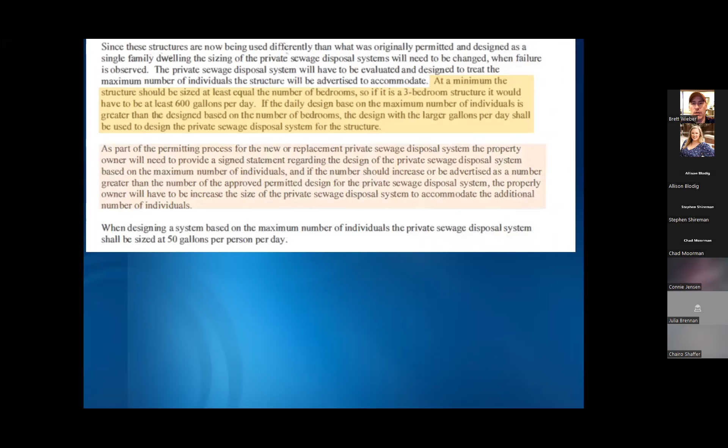But if they're designing it for the number of people, they're going to have to look to see which is greater. And that design is going to be based upon 50 gallons per person per day. And that's within the private sewage disposal code, the design criteria for boarding houses. So it's in Appendix A under the quantity of sewage flows under boarding houses.

It's 50 gallons per person. So as we're sizing those systems, whatever they're advertising it as, that's what they're going to have to size for. If they say, okay, we're not going to have that many people, we're going to make the system smaller for fewer people, that's fine. But if it's ever advertised, you'll have to put that in writing, or establish that the permit was sized based upon this number of people.

And I know sometimes it's hard to address that after it's been installed. But if they're ever advertising it or you're seeing it, or if there's an issue with the system because it's not functioning properly because they put in a smaller system, oops, sorry about that. They will have to size it per the criteria of the code. Since it's non-residential at that point, they have to size it per the number of persons and the boarding house criteria.

The next thing is the iron curtain system. This is a component that was added to a couple of systems, and there was failure after this system was added. From what I'm hearing, the use of this system is increasing the amount of water going to the system. So I am still waiting on a contact from an individual within the manufacturer to give me how much water is actually pushed back from these during the flush or the regeneration portion.

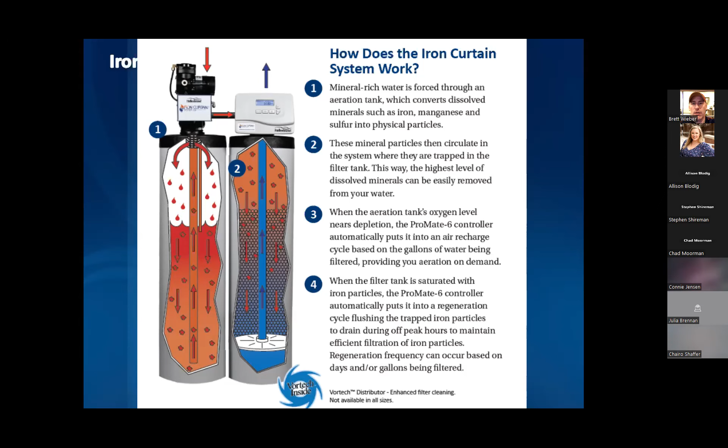But I know as with water softeners, sometimes one cycle is great, so let's do multiple cycles, and that may cause an increased amount of water coming back to these systems. They are considered a green system just because there are no chemicals added to the system. It's just aeration and filtration. They're removing the iron, the manganese, and the sulfur from the water. So if they have hard water odor or issues, those are going to be removed through this process.

So like I mentioned, it is considered a green system, but the issue is with the regeneration after flushing the filter, how much water is actually being used and pushing those minerals back into the septic system. So as soon as I get more information on that, we'll definitely pass that on, or if there's a need to modify, make any changes or any recommendations, we'll look at that.

But it's hard to say, with the two systems that failed immediately or very shortly after those systems were added on, if there were other factors that might have been contributing to that. But those are some things that I'll try to research more and get those answers out to you.

The NPDES permit: as many of you know, US EPA no longer issues the permit. That is now done by Illinois EPA; February 2020 is when Illinois EPA took over. They do offer those permits. If you have questions as far as when they need to get a discharge permit, they do have the authority over that, so I would recommend contacting them.

If you go to the ILG62 website for permits, it'll give you contact information. There was some change within that program, and I'm not sure who the head person is at this point. I haven't been told who that was yet. But if you contact them and ask for the engineer on duty, they'll be able to answer those questions regarding the NPDES permit.

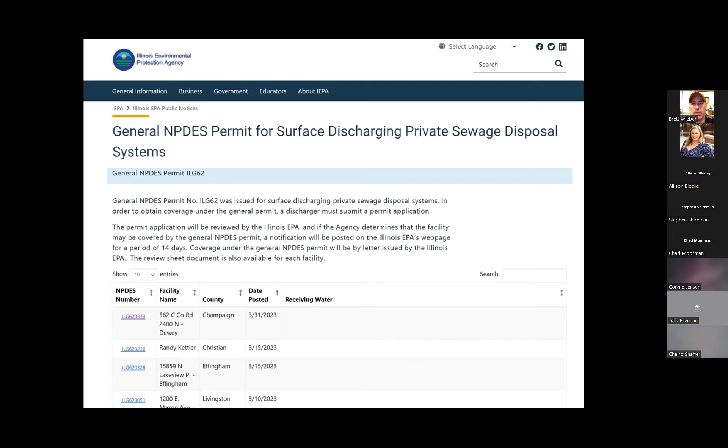The UCCGP program is the Unsewered Community Construction Grant Program. This is done by Illinois EPA with funds that they have available for wastewater systems, sanitary sewers. It's a grant program, so they do have money available. They do understand that there are quite a few communities in Illinois that are unsewered, typically the wildcat sewers, those kind of issues, or systems where they need an extension, and there's not a lot of money available for that

community. So this is a way for a few communities each year to get that sewer extension or to get that sewer development through the state with the grants. This is the second year they've done it. So each year they give about $20 million. So there's about 4 to 5 systems that are going to get those funds. I know that doesn't take a big chunk out of the 200, but at least it is a starting process, and they can get some of those resolved with getting sanitary sewers.

Some individuals were concerned about trying to get those grants submitted. It takes a lot of funding just to get the grants submitted, just to get the footwork, to get all of the paperwork done. If you have large communities, they usually have people on staff that can help develop that and do that. But the smaller communities don't have those people on staff.

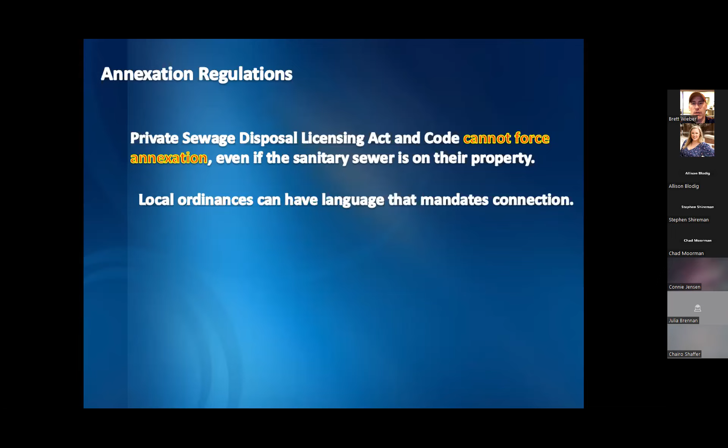They may have language that mandates that, so if the local municipality or sanitary district extended the sewers and then basically stated that when your system fails, you'll have to connect to sanitary sewer, that's fine because that's the local ordinance that is forcing the connection. But as far as the state code, if they don't have anything in their language that specifies they have to connect, the state code cannot force them to become annexed into that municipality to connect to the sanitary sewer.

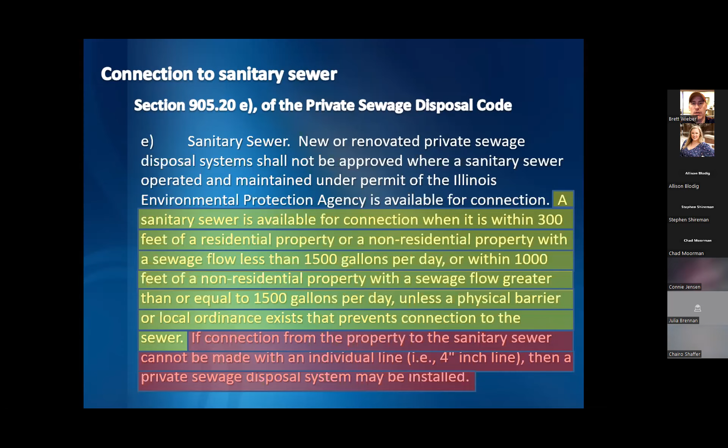So as I said, the local jurisdiction can put more stringent language in their ordinance if they'd like to, that would say, if you're within that 300 feet, that you connect and not have any other connection, either by pump or otherwise, and mandate a more stringent requirement. But as for the state code, we can't force that.

Usually, like I said before, it's established by the municipal or sanitary district that have those connections when they develop the sewers or extend them, that the regulation is put in at that point. It's when somebody fails, then they have to connect.

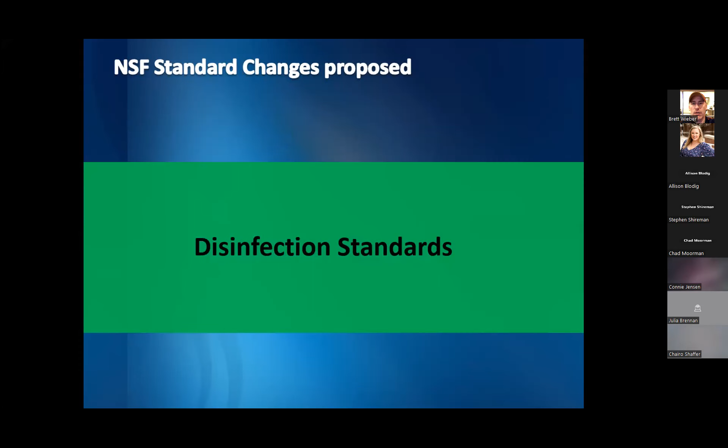NSF standard changes are proposed. So we're looking at the disinfection standards. NSF has a wastewater committee, and they are looking at the different types of disinfection, 3 main types: UV, ozone, and chlorination. They're saying that there'll be some areas that need multiple methods of disinfection to protect public health, depending on what the receiving environment is.

At this point, I don't see Illinois seeing multiple disinfection processes, but this is something that's looked at across the nation. With this standard change, they're transitioning from NSF ANSI 46, which is the current standard for disinfection devices and components, and moving that over to ANSI NSF 385 for disinfection mechanics. So it's a specific standard for that alone.

And this would be for NSF 350 systems and NSF 40 systems. So it's basically going to be an evaluation process for chlorine, UV, and ozone to be utilized on wastewater. So it'll have the same standards. They're looking at getting this adopted in the next 5-year process, finalized probably in February of 2025. So anything that's currently approved under the Illinois approval would still be approved.

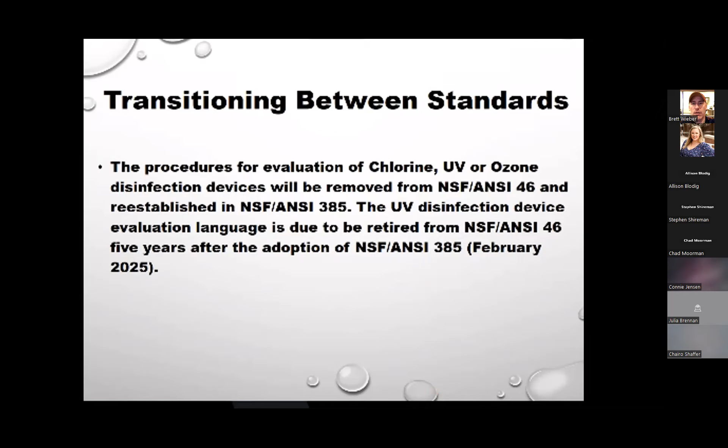New technologies could use this standard to get approved in the state. They could get theirs tested to NSF ANSI 385. So they're going to probably start evaluating in 2025. As I mentioned before, this can be used for NSF 40 or NSF 350. NSF 40 is obviously the common system in Illinois, and there are more NSF 350 systems coming in.

NSF 350 is actually a water reuse standard, so the effluent from the NSF 350 system can be reused for non-potable sources, toilet flushing, car washes, or irrigation back into a structure. They could be used for decorative fountains, not water fountains, or other applications for water, but it would require disinfection to go back into the structure. So those could fall under the ANSI 385 scope. So basically all of them will be tested with the same effluent.

The NSF 46 standard is different from what I've seen from 385. With NSF 46, they put the system in, have it operating for over a month, and then do an evaluation to see what the effluent is based upon the flows and those criteria. They do a lot of different testing through that entire time, but the biological and parts per million in that one test shows how well that system's operating at those flows. So I think this is going to be a more detailed analysis of those units over a longer period of time also.